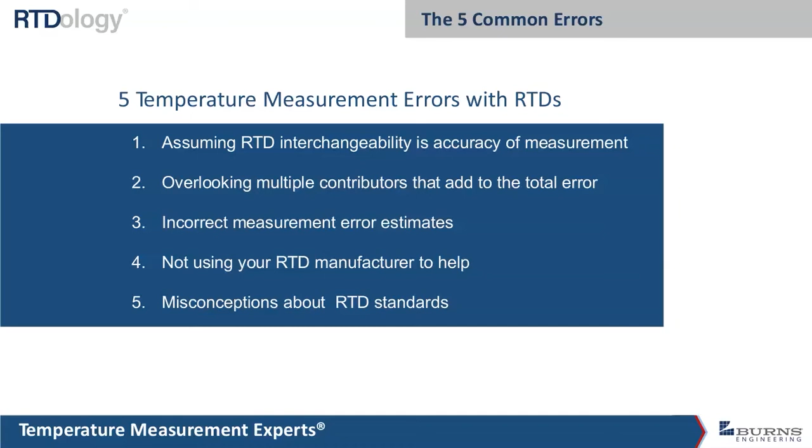So we'll start walking through each one of these. First off, I want to go through some definitions, talk a little bit about interchangeability, and then we'll look at several error sources that come into play with RTD temperature measurement. Then we'll look at how to combine all those different error sources to come up with a measurement uncertainty. And then we'll do a quick review of those same 5 points and maybe a few additional items on how to improve that measurement accuracy.

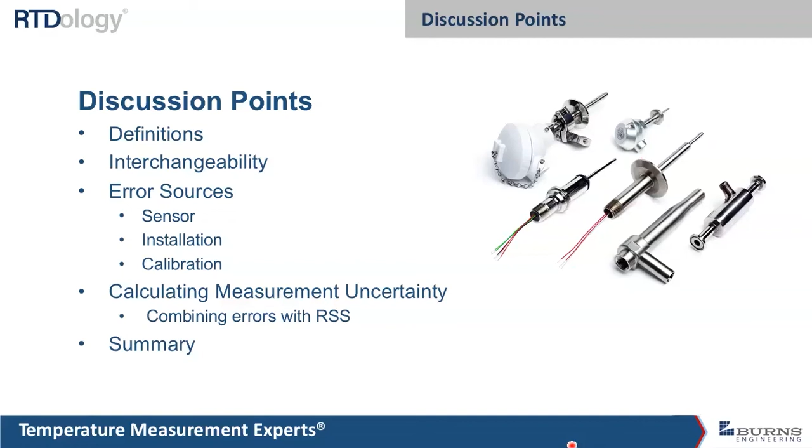First off, when we look at measurement and error, we probably all know what those are. So I'd throw them out here so that we're all on the same page to begin with. Where it really gets a little gray is the difference between accuracy and uncertainty.

The uncertainty is a quantitative measurement where we look at a whole bunch of different error sources, and we can combine them using a variety of methods, and we come up with what we call an uncertainty of that measurement. And if you talk to metrologists, that's what they're going to want to do. That's kind of their language.

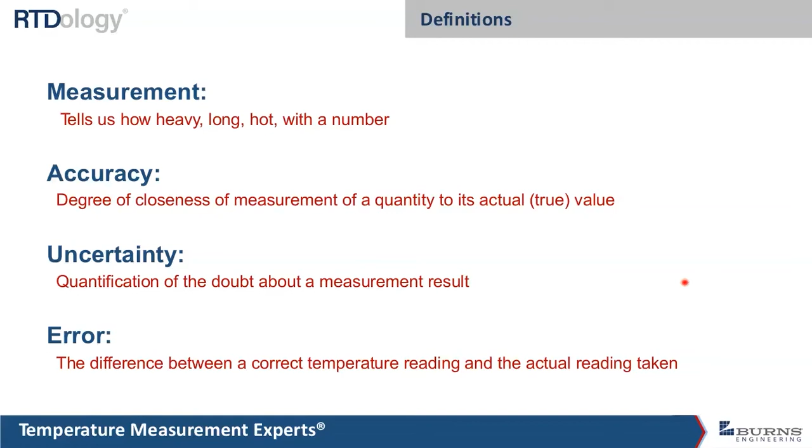But when you pick up a temperature probe or a tape measure or something, you wonder, well, how accurate is it? So there's a number there, and they say, here's the accuracy, and it's plus or minus this much. And that's just a little bit not totally correct. I'm going to try to explain some of that.

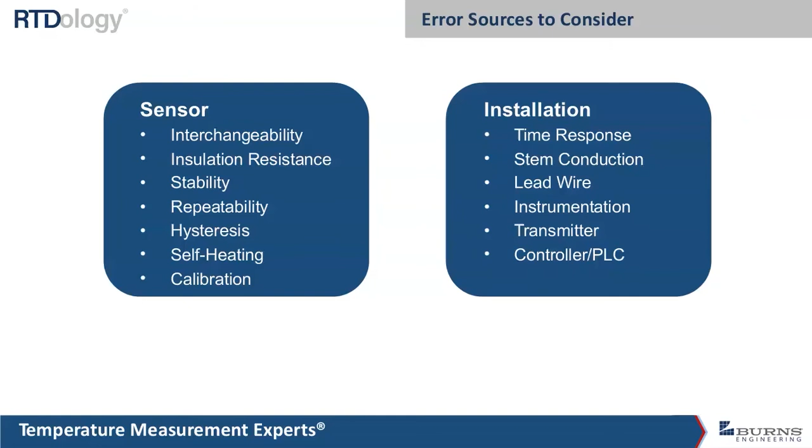So when we're looking at error sources here, I like to divide these into 2 categories. There's the sensor errors, and then there's the installation errors. Most of the time, the installation errors are by far a lot greater than what the sensor errors are. But first, we'll go through and look at just a handful of the ones that apply to the sensor, and then a few of the more common error sources with installation. It's certainly not all of them, but these are typically the biggest contributors to an uncertainty measurement budget.

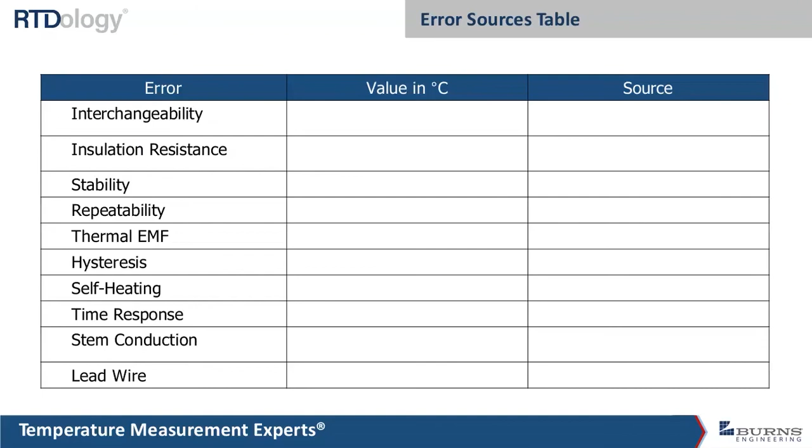Yeah, I don't know, people find it useful just to have these. I just jotted down a few of the ones that I find are the biggest contributors. There's certainly others, but these are what I think are the most important.

So I think the biggest misconception here that I see with RTDs is what's called interchangeability. A lot of times manufacturers don't even mention this. They'll just have in their specs that it's a class A RTD or a class B. That isn't the accuracy of the RTD. It's not the accuracy of the measurement. It's just the tolerance band that the manufacturers use when they're building the parts.

The two standards that are followed are ASTM and IEC. They lay out the groundwork, the playing field of what an RTD should do and how it should perform. They're not real stringent, and you'll find a whole variety of RTD performance that all meets the standard, but some far exceed it. You typically pay a little more for those, but you get better accuracy, stability, and repeatability.

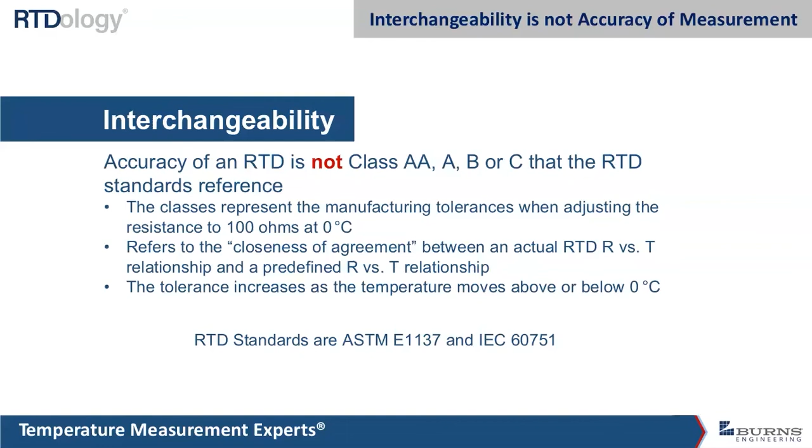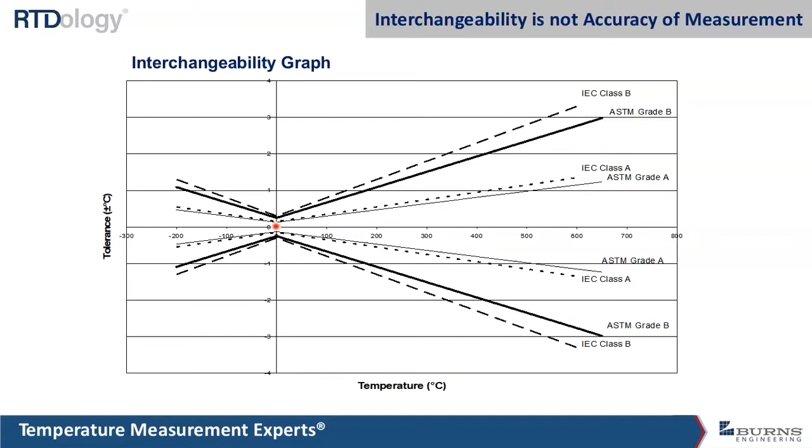We look at it in graph form. You can see that at 0 degrees C, right here, is where this interchangeability number tolerance band is the most accurate. That's where the manufacturers trim the little platinum resistor to as close to 100 ohms as they can get. These are the temperature bands, and as you move away from 0 degrees C, the tolerance increases. That's where a lot of the accuracy or uncertainty mistakes are made, and we'll look at a couple examples of how that happens.

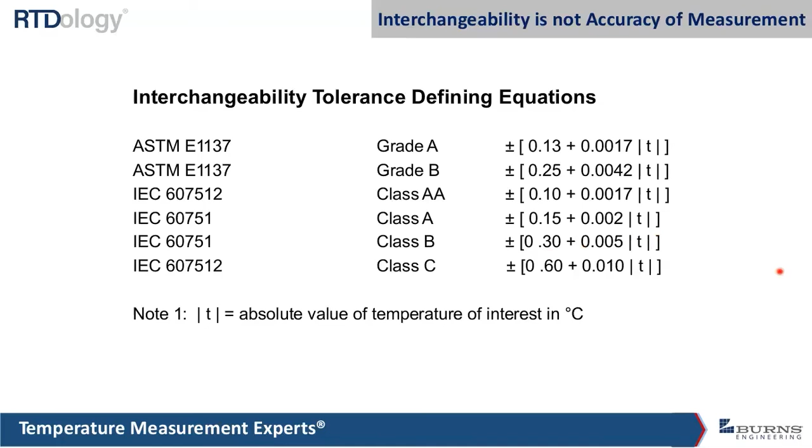Just a little example here: this one's at 65 degrees C, and this turns out to be plus or minus 0.52 degrees C.

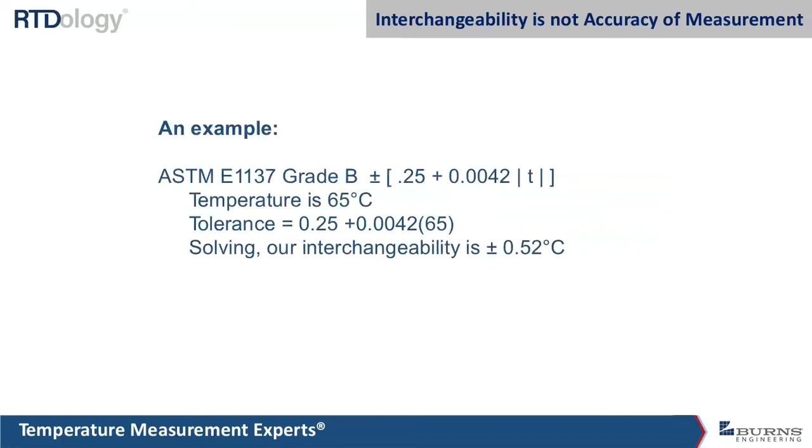Some other error sources: insulation resistance of the probe. This typically isn't very big, but it can cause a lot of repeatability problems. If you make a measurement 10 times, you're going to get 10 different readings, and they could be quite different depending on how bad the insulation resistance is. Typically what happens is you take a megohmmeter and measure between the probe sheath and the lead wires, and it's typically in the hundreds of megohms. I think the standard specifies 100 megohms as a minimum, maybe 200 megohms minimum at 0 degrees, but a lot of manufacturers' specs will say 500 megohms at 20 degrees C, room temperature.

Just to get an idea of the magnitude of the error: at 100 megohms, that's hardly even worth talking about, 0.0003. But if you get down to half a meg, 500,000 ohms, it could be pretty significant.

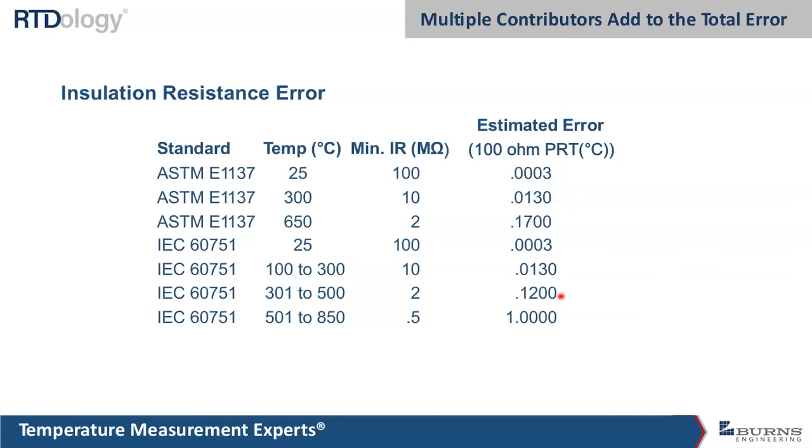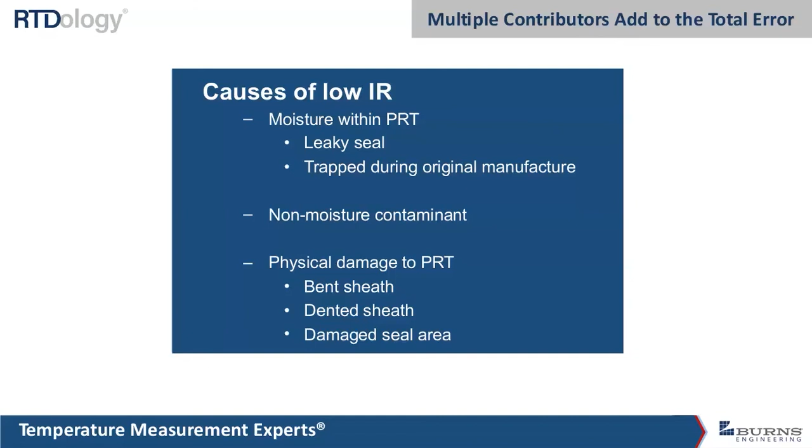What typically happens is that moisture gets inside the probe and shunts between either the lead wire connections or the little coils of platinum wire, providing an easier, lower resistance path for the electricity to take. So you get a lower than actual temperature measurement. That moisture moves around a little bit, and that's where the lack of repeatability comes from. As soon as you put electrical power to that coil of wire, it heats up just a little bit and can move the moisture around pretty quickly. Moisture is probably 95+% of the issue. Sometimes if there's been damage to the RTD that can do it too, but that's pretty rare.

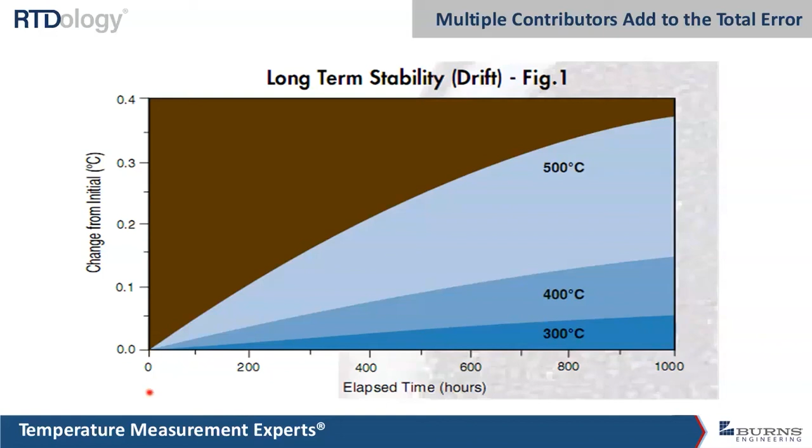Another good error source is long-term stability. In this graph I pulled from a catalog, it shows what happens over time. After a 1,000-hour heat soak at 500 degrees C, which was the max rating for this RTD, we're at 0.35 degrees C of drift. This typically would be an increase in indicated temperature, not always, but typically. If you're down around less than 200 degrees C, it's almost a non-factor, just 0.0-something degrees C, which for most processes is pretty insignificant.

Repeatability: the manufacturer should have a specification for this also. With all of these things, repeatability, stability, drift, and so on, you should be able to find published numbers for the RTD. If you don't, you may want to consider going somewhere else that does tell you what these are, because they're really important, and the manufacturer is the only one who really knows how their probes perform. Some are a little more conservative in their estimations based on testing they've done, and some are a little more liberal. But it certainly says they've taken the time to find out how their equipment works and to publish it.

Repeatability usually comes in as a number measured over different temperature cycles across the service temperature of the probe. In this example, it's 0.1 degrees C after 10 cycles.

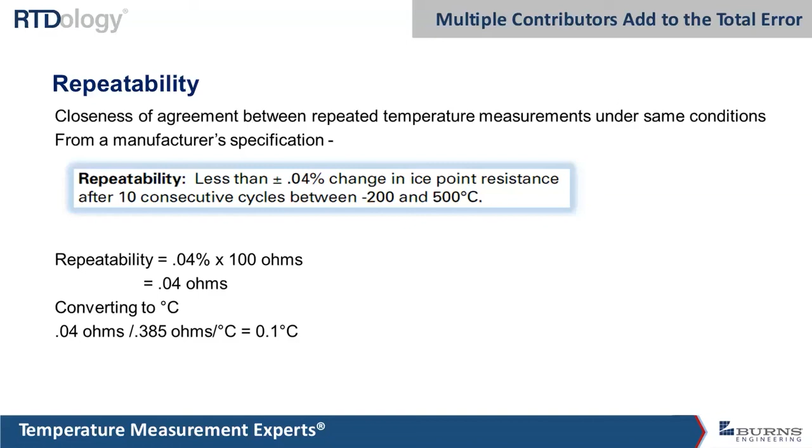Hysteresis really only applies if your process is heating and cooling more than about 100 degrees C. If it's less than that, this number is so tiny you don't need to pay much attention to it. It's the error that happens if you heat the temperature probe and then cool it back down, and at the midpoint of that heating and cooling cycle you'll have your maximum repeatability difference. It could be a tenth of a degree, for example, if you cycle between -200 and 500 C.

This manufacturer calls it 0.04% maximum.

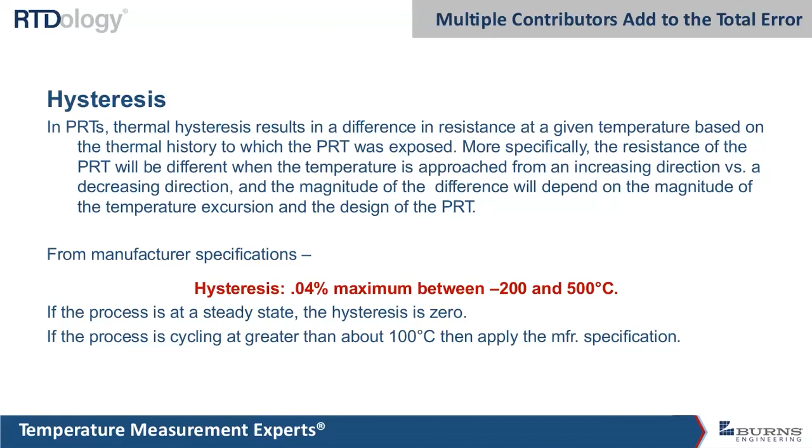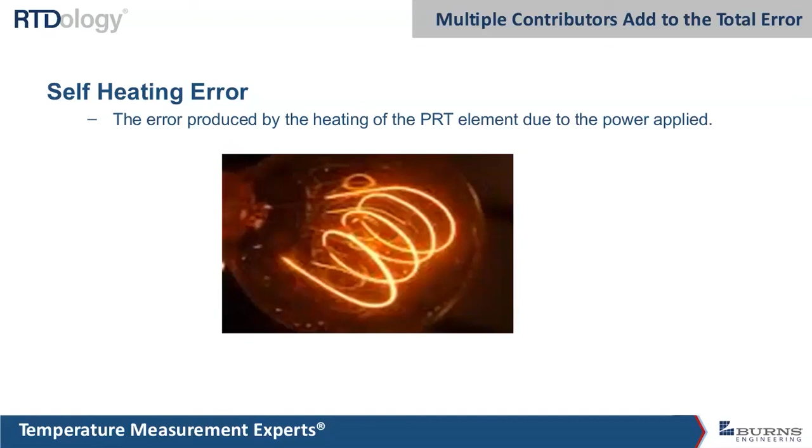Self-heating: RTDs are either just a coil of wire or a little tracing of platinum on a ceramic substrate. Anytime you run electrical current through a wire, it's going to heat up, and it's no different for an RTD or PRT, platinum resistance thermometer. That's going to give you a higher than actual temperature measurement. The error source here, using the simple equation power equals current squared times resistance, and using 65 degrees C, we crunch through the numbers and end up with 0.007.

That's a pretty small number, and this is just with 1 milliamp of current. If you had 2 milliamps, that number would double. Most transmitters, controllers, PLCs, and similar devices that RTDs plug into are probably around 1 milliamp. Some transmitters are like 0.8 milliamps, and I've seen some chart recorders with an option for 5 milliamp current, which seems a little ridiculous to me, but they may have reasons for it. Anyway, it's another small error source you might want to consider adding to the measurement uncertainty calculations.

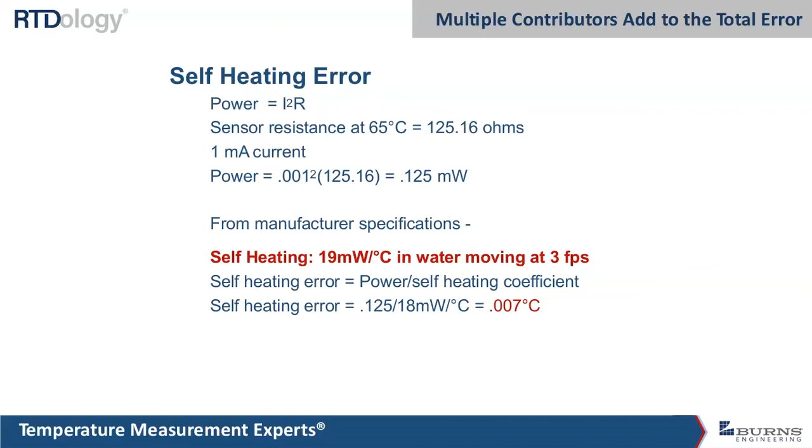I think here, Jeff, are there any questions we can go through, or shall we just keep plowing ahead?

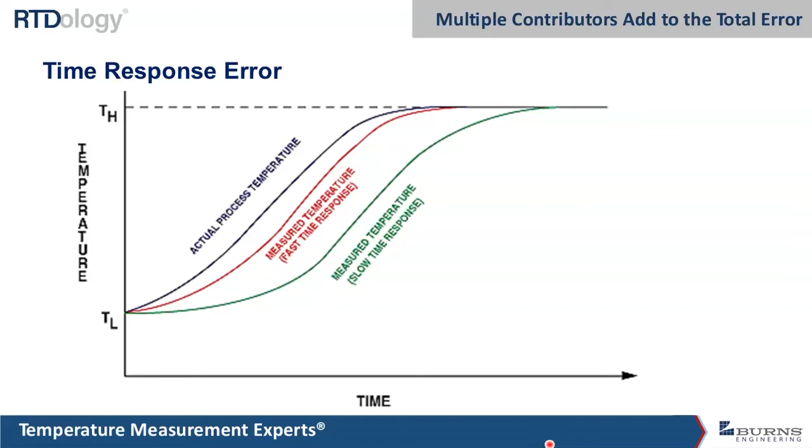The next, probably one of the more common error sources I see, is stem conduction. This one can be a little hard to quantify. It's really related to the immersion depth of the sensor, the style of the sensor, and the heat transfer characteristics of the process you're measuring.

If it's something like water, it's pretty easy to measure that temperature. But if it's something like steam or even air temperature, that can be more difficult because that heat transfer just doesn't happen very quickly.

I've also noted that processes like food and beverage products with a higher fat content show more stem conduction error. It could actually be demonstrated with a cup of coffee—one black, the other with cream in it—the one with cream cools off slower than the black coffee does. It's just that fat content that tends to insulate the fluid, I guess is the best way to put it.

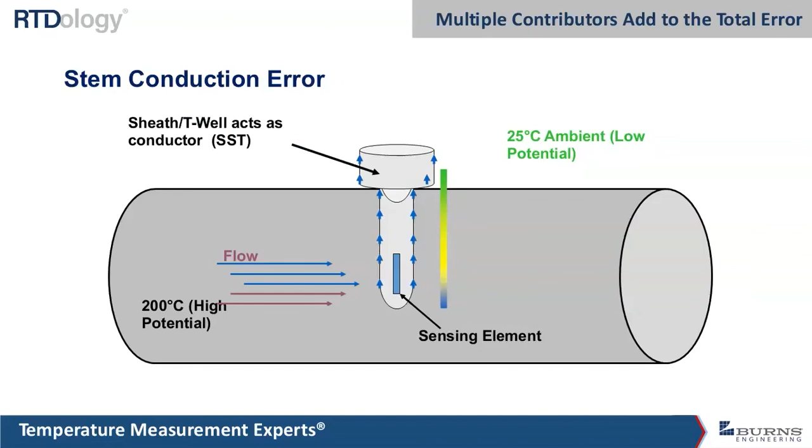I can just kind of show this graphically. If we have 200 degrees C fluid in a pipe and a temperature probe stuck in there, there's just going to be a little bit of a chilling effect on the sensing element from the ambient condition, which in this example is 25 degrees C. So if you get enough immersion length, that error goes away. Here's a little graph that shows this, and it's kind of hard to see some of these numbers, so I'll just walk through it.

So what this test was done with is this type of an assembly: a tapered thermowell, and I think this was a 13.5-inch long immersion probe. And we just took a bunch of data points.

At about 4 inches of immersion, there's almost no stem conduction error. It starts to grow at 2 inches, maybe a couple degrees C. But as you get shorter and shorter, it gets worse and worse. So with this style of temperature probe, you want at least 4 inches of immersion to get a good, accurate measurement. And of course, this is in water, so the fluid's going to matter.

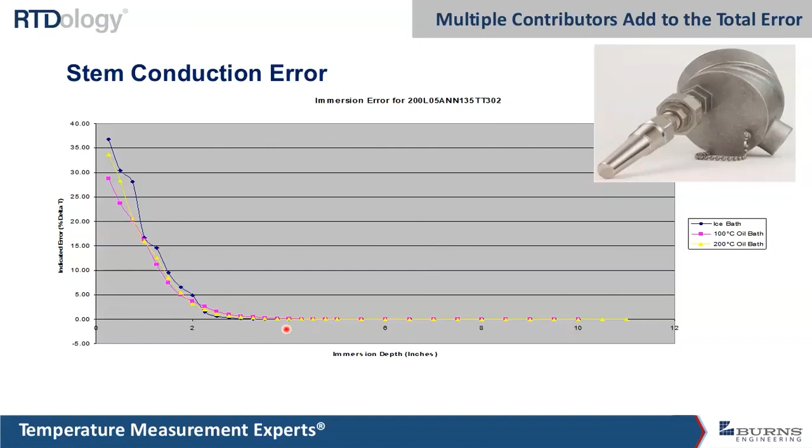If it's air, you're going to need more immersion. If it's some other fluid other than water, you're going to require a little more immersion or a different style sensor. I've done some other presentations on stem conduction where we go through and look at a lot of these factors in detail. But just as a quick overview, things like tip-sensitive probes really help, as does insulating the outside of the process. And again, lean on the manufacturer for help if you're seeing some type of error.

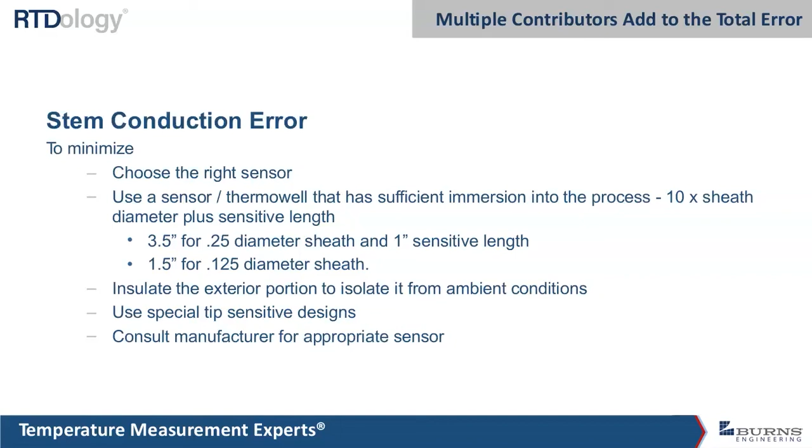Lead wire error. This really only applies to 2- and 3-wire connections, and most industrial applications use either 3- or 4-wire. Very few things use 2-wire except for HVAC type equipment. If you look at an 18 gauge cable, absolute worst case, you've got 0.16 degrees Fahrenheit for every 100 feet of that stuff that you use.

If we use a 4-wire connection, the transmitters and controllers and things can completely compensate for that lead wire error. But if you're stuck with 3-wire, I put together this little table here. This is the wire gauge. So if we look at 22 gauge, pretty common, and if we have a grade A interchangeability, typically if you go over 15 feet, there's going to be enough variability in resistance between the 3 leads to cause a problem.

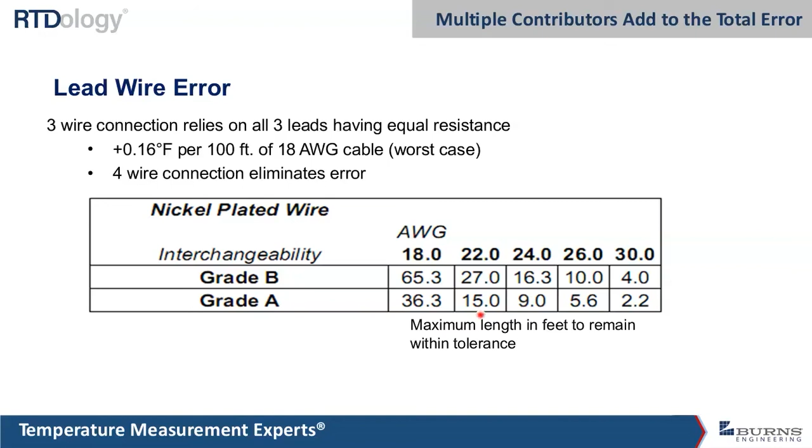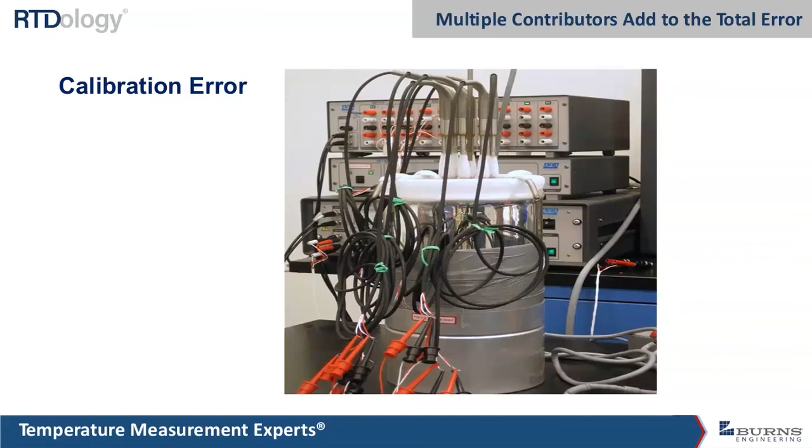Then moving on to calibration error. I was kind of debating whether this is a sensor error or an installation error, but despite having all kinds of fancy equipment, fixed point baths, and comparison calibration to a primary temperature standard, there's still an error that comes into play between the high-end metrology equipment and the probe that you're using in your process. So this error needs to be included in our uncertainty calculations.

These are just a few of the factors that come into play, even in the calibration lab. Even humidity and the ambient temperature conditions can have an effect on the accuracy of the equipment that's used.

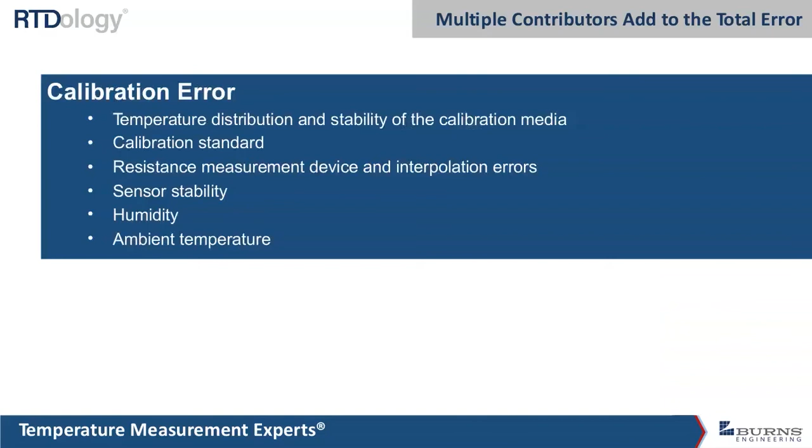And then there are other sources, and these are really specific to the installation. If you know or can measure a vibration level, that can actually help the manufacturer of your RTDs define what a potential error might come into play. If an RTD is seeing a lot of vibration, it tends to start work hardening the platinum coils, and it will cause the resistance to increase over time. It can be a very small number, and it may take several years, but that can contribute to that drift as the probe ages.

If it is severe, it can happen as quickly as a few minutes or hours or days, maybe months. So if you can quantify what's going on, it can help your manufacturer come up with a number to apply to your uncertainty budget.

One of the things I wanted to mention is thermal radiation. I had a situation with a new installation where a temperature probe was put into an uninsulated pipeline, a little tubing system. They validated the system and everything was working fine. Then they went into production, and all of a sudden that temperature probe was reading a lower temperature than what they expected.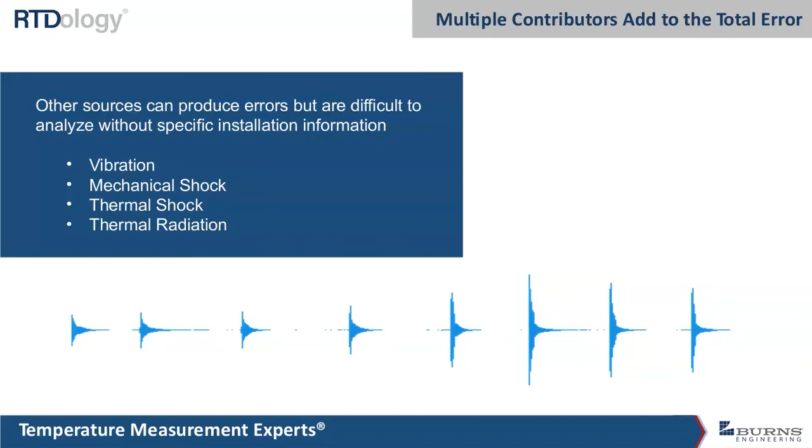So what do we do with all of these errors that we've got? One of the easiest ways to combine these and come up with a standard uncertainty is with this root sum square method. So we just take all the error sources, square them, add them together, and then do a little square root.

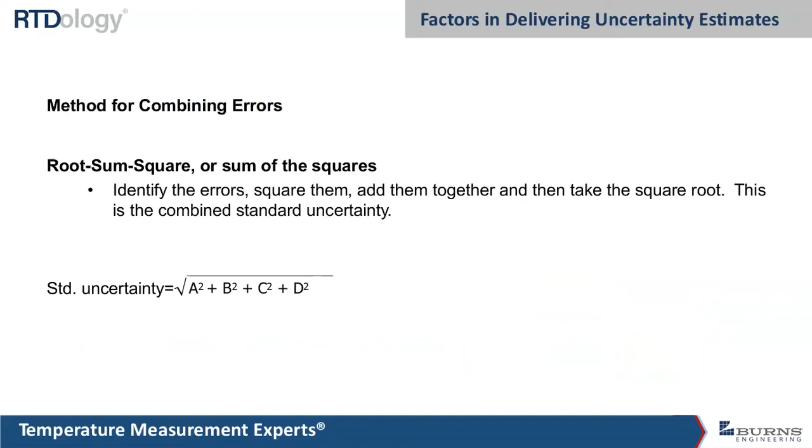And if we want to do an expanded uncertainty for this 95% confidence level, we just multiply by 2.

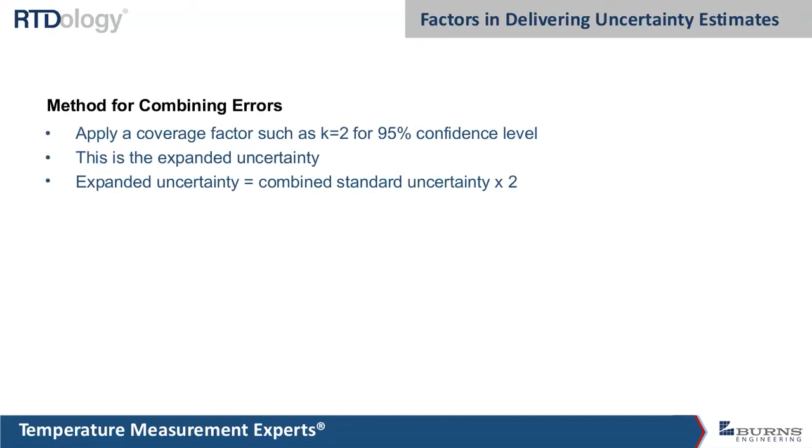Just a little example here, again using 65 degrees C, and I made up some error sources. There was some stem conduction in there, there was repeatability, there was some vibration going on. And I came up with 0.713. Then if we go through and apply our coverage factor, we end up with plus or minus 1.43 degrees C. That's at 65 degrees C using a class B RTD.

I just throw this out there to show that if we look at using just the interchangeability number and say, okay, I can stick that probe in my process and it's plus or minus 0.3 degrees C, well that is way far away from what reality is. We really need to go through, look at all these different error sources, put them together, and do this kind of an exercise to get a good expanded measurement uncertainty number.

Now, fortunately, there are ways to improve this kind of a measurement. In another presentation I did, I go through this in great detail about how we can improve each one of these. In fact, if you go to RTDology on YouTube and just search RTDology, that presentation is in there, and it goes through this in a little more detail.

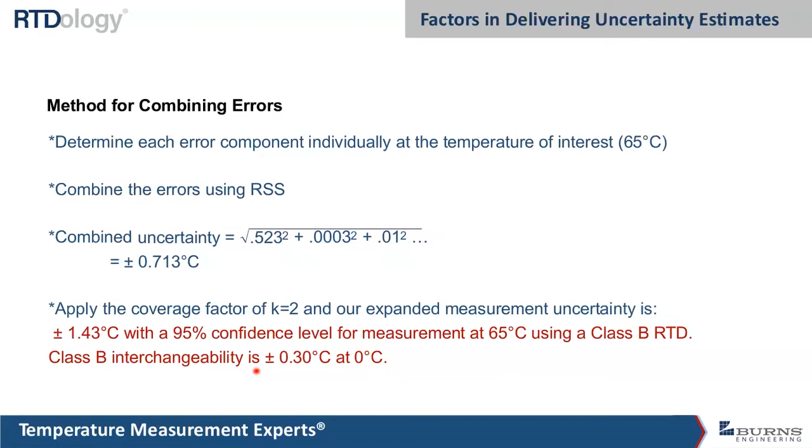Anyway, this is just to raise awareness that interchangeability is not accuracy of that measurement. We need to look at all of the different error sources that come into play, and we need to go through combining these errors.

If you are not comfortable with that and you don't have a metrology staff in the plant, call the manufacturer. I know I do a lot of assistance with this kind of calculations with our customers. Most of the RTD manufacturers can help. If they can't, again, you might want to think about going someplace else.

And then the standards for RTDs - these are just kind of the playing field. They're not particularly stringent on the performance, and you're going to find all different levels of performance from different manufacturers. So it does pay to shop around if you're looking for the best, most stable, repeatable, accurate temperature measurement.